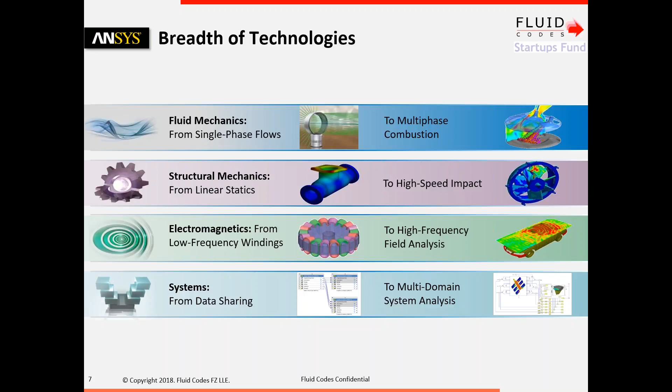And also from the systems point of view. The system part will be covered as well in another webinar. But we are able to simulate the whole multi-domain system inside ANSYS. Obviously, we have a huge number of customers nowadays. You have here just a small representation of the most important ones. As you can see, ANSYS is a general purpose software, which means that as long as you are able to draw your geometry, you can simulate it. It's not a software only for oil and gas. It's not a software only for nuclear or for turbo aerodynamics, for example, or automotive. As long as you are able to draw the geometry, you can simulate it, provided you know your conditions.

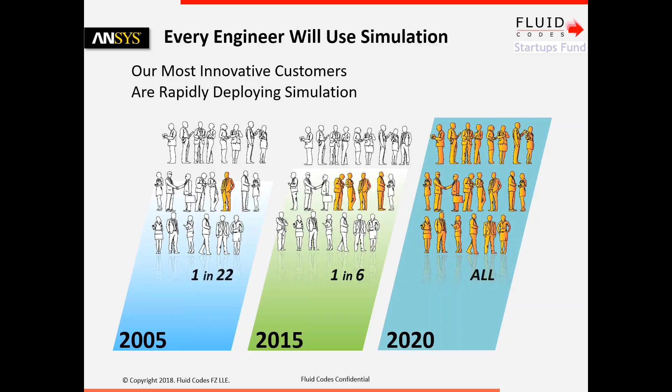Okay, if we talk about the startups, because actually our intention with this webinar was to address and focus more on the startup industry. We are aware at ANSYS that once you are starting your business, obviously the budget is going to be one of the limitations. But on the other side, you want to maybe create a new disruptive technology, which is going to change

let's say the ecosystem. So that's why ANSYS decided to create the startup program, which I'm going to discuss with more information in the next slide. Right now we have over 240 startups in this program, and this number continues growing week after week. So what is this startup program, and what are the benefits?

First of all, you will have the industry leader in terms of simulation. So you will have access to the whole ecosystem for mechanical, fluids, as well as electromagnetics, in order to perform the full analysis of your system. On the other side, you will have access to the largest simulation company in the world, with more than 450 PhD level engineers working in support, as well as many more engineers working in development and support for your cases.

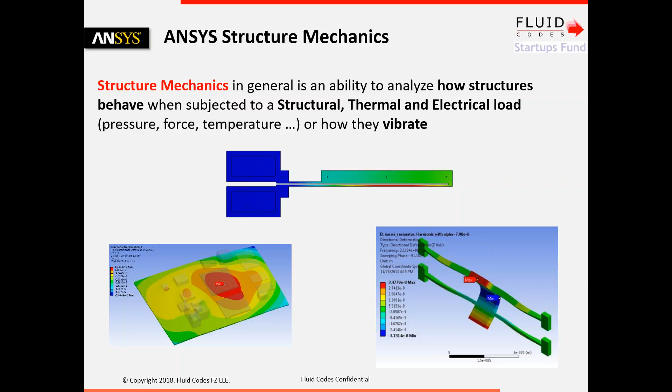So in order to talk about simulation, there are three types of physics that can be analyzed. The first one is what we call structural mechanics, also known as finite element analysis. So everything related with the solid part, everything related with how structures behave when they are subjected to structural, thermal, electric loads, how they vibrate, everything which is related with the solid part will be simulated with what we call structural mechanics.

But there are situations where also we need to take into account the fluid surrounding our structures. For example, in this PCB that you have in this image, you might need to evaluate the cooling process inside the PCB. So in order to analyze the dynamics of the fluid, we will use what we call computational fluid dynamics, also known as CFD. So with CFD, we will be able to analyze any problem related with the fluid part.

As I will show you later, the idea is that we will couple all these worlds. So in other words, if we think about a PCB, I will use CFD for getting the temperature profile of the solid part, and this temperature profile will be interpolated in the structure in order to perform the structural part, like thermal strains, von Mises stresses, etc. So even though I'm mentioning these different physics in a separate manner, the idea is that all of them will be connected in a multiphysics environment.

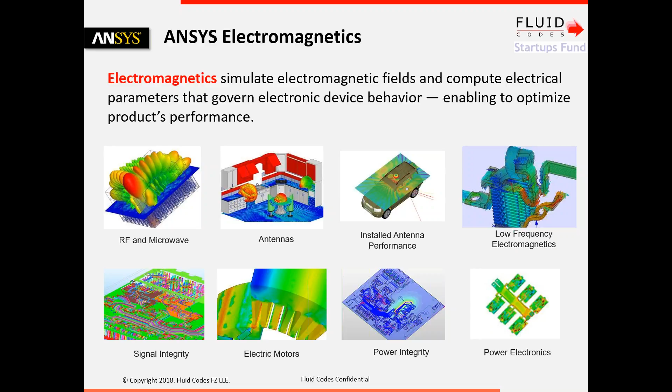All right. If I continue, the third type of analysis that we can perform is what we call electromagnetics analysis. And in electromagnetic analysis, we will simulate anything related with the electromagnetic fields. So let's think about power integrity in a PCB. Let's think about signal integrity. Let's think about antennas, radio frequency, microwaves, low frequency cases like a transformer. All these type of situations which are involving electromagnetic waves will be simulated by performing electromagnetic analysis.

And the good news in this case, as I mentioned before, is that ANSYS has the whole portfolio for this type of analysis. So how is the workflow actually whenever we deal with simulation in ANSYS? First of all, we need to create a geometry. So we need to have a CAD or a representation of the geometry. It can be done outside of ANSYS, or it can be done inside ANSYS. We have both options. And once we have the geometry created, we will create a mathematical model, also known as a mesh.

So once the simulation is done, we will post-process, meaning we will evaluate temperature profiles, we will evaluate currents, we will evaluate stresses, etc. And then we will optimize. So meaning that we will say, okay, I want to have the maximum temperature in this part of, I don't know, 30 or 60 degrees Celsius. So let's change the boundary conditions so that this, which is my target, is matched. So this is what we will call optimization.

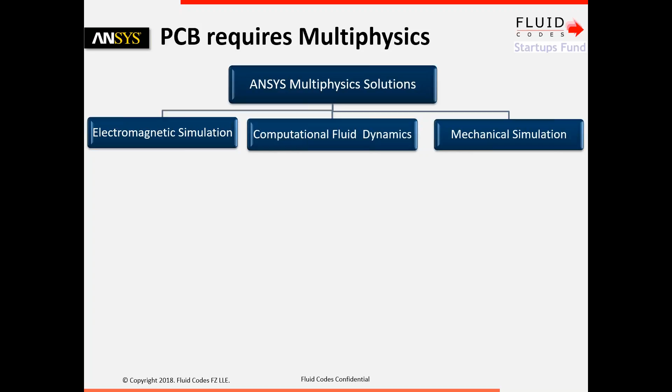All right. So let's think now about PCBs. Since we are focusing on the semiconductor industry, as most of you are aware, PCBs are a key part of structures or devices that we need to design properly. So let's focus now more on PCBs actually. So first of all, PCBs by nature are multiphysics. By multiphysics, I mean that all types of simulations that I described in the previous part are applicable, or can be applied to PCBs.

For example, if we just think about electromagnetics, we may have a PCB where we need to calculate the power map, okay? Or we might need to calculate radiation, interference, current densities. So this is what we will calculate, and we can calculate it with an electromagnetic simulation.

Okay, but the thing is, these currents will be causing, because of the Joule effect, an increase in the temperature in my PCB. So these current densities, which are going to be calculated in the electromagnetic part, I need to import them in my computational fluid dynamic analysis, where I will be able to take into account different gases, different fluids surrounding my structure.

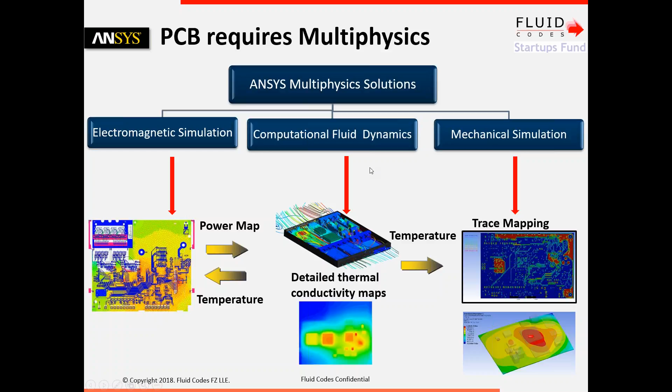So as I said before, the intention of this webinar is to focus basically on the mechanical part. So I just want to give you an overview, a few slides about the other two parts, and in the next months we will have new webinars where we will talk about electromagnetic analysis as well as computational fluid dynamic analysis more deeply. So for this part, I just want to give you a quick overview of each of the other two before going more deeply into the mechanical part.

So if we think about electromagnetic simulations only, okay, we have any type of analysis that can be done there, from low frequency to high frequency. ANSYS has a bunch of products which deal with this type of analysis. So if we see the trends in the electronics industry, we can see that miniaturization is one of the most important parts, okay?

So if you think about the first cell phone, which was invented in 1973, the weight was around 2 pounds. And if you take into account any modern phone, the iPhone 6 for example, we are talking about 4.5 ounces, okay? And before you were only able to talk. Now you can send emails, you can be connected with other people directly with a chat, you can go on the internet. So miniaturization is one of the key points that the electronics industry is going through.

If we think about mobility, wireless connectivity, well, if you think about 12 years ago, let's say 3% of the population maybe were using cell phones. Now every single person has at least one mobile. So you can imagine how many antennas you need to keep the communications with all these devices.

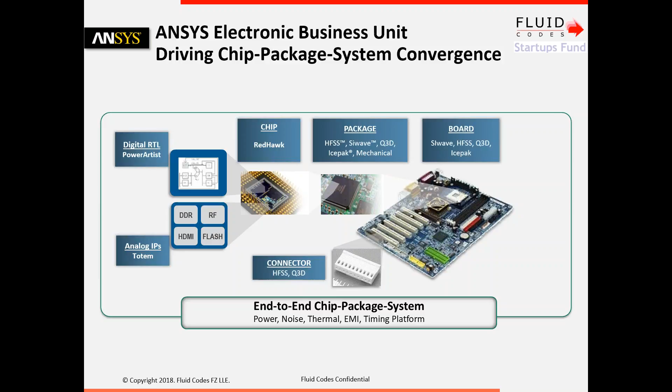Now, if we focus from the computational fluid dynamic point of view, one of the key points where ANSYS is used for PCBs or the electronics industry is for electronic cooling. There is a specific product called ANSYS Icepak, which is an integrated electronic cooling solution for packages, boards, and electronic systems in general.

It is combined with other packages for importing electronic CAD representations of the geometry. It will allow you to automate the meshing process. It is based on ANSYS Fluent, the leader in CFD analysis in the industry, and has a lot of advanced capabilities. It is linked with the rest of the ANSYS product portfolio.

As I said before, we will deal with this in the CFD webinar. But for electronic cooling simulations, there is a specific product called ANSYS IcePak. It includes a vast library of standard electronic components, which will help you model the creations without having to search for the manufacturer's data sheets for additional information.

It includes a lot of information for material properties, for fluids, solids, and surfaces. It takes into account fans, in case you want to simulate the cooling fan for the device. There are operating curves from fan manufacturers like Panasonic, Sanyo, Delta, EBM, etc. It also has a lot of filters, like fan air filters, depending on the vendor part number you want to include in your simulation.

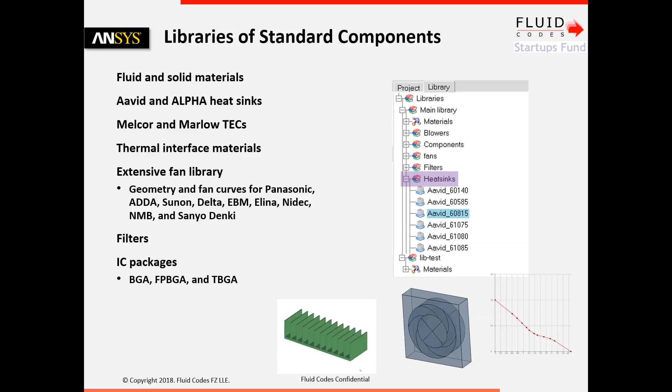So it's completely the tool for taking into account electronics cooling. Even though it's a tool focused on electronic cooling, it uses the best-in-class CFD solver in the industry, called Fluent. Fluent is a very well-validated software for computational fluid dynamics, and it will allow you to calculate temperature profiles using conjugate heat transfer, and also use parallel scalability with ANSYS HPC.

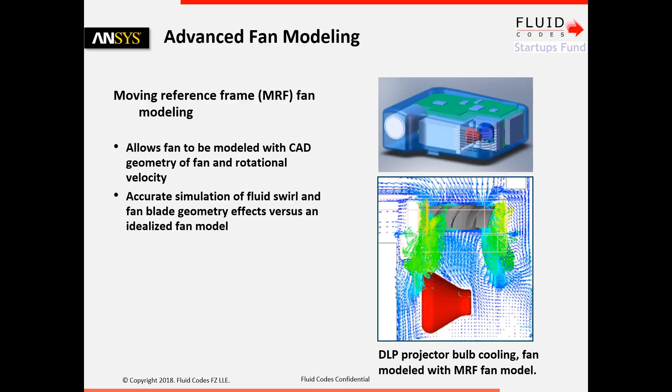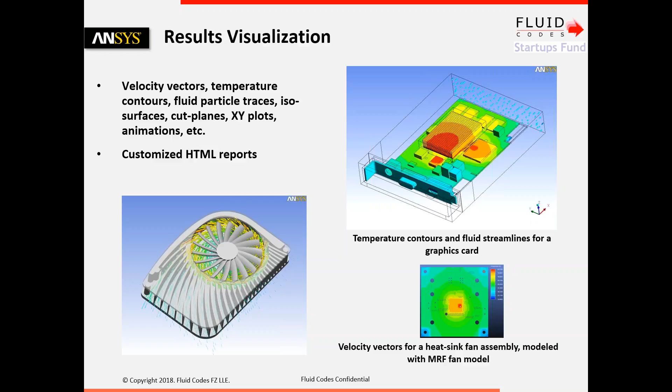As I said many times already, there will be two more webinars based on electromagnetics and CFD. From now on, we are going to focus on the mechanical part of the electronics industry, covering different applications focused on the structural or mechanical part. So what can we do with structural mechanics? First of all, we can perform the simplest type of analysis, a static analysis where we don't account for inertial effects, and we consider linear behavior.

So my material is linear, for example structural steel, aluminum alloy, before having plasticity. But also we can consider nonlinear effects, so let's say we want to take into account a nonlinear material like rubber, hyperelastic materials, or plasticity. We can take into account this type of analysis as well, but this is from the static point of view.

But also we can go and say, no, I want to perform a dynamic analysis, which in PCBs, as I will show you later, is going to be one of the key points. So we might be interested in vibrations, for example, or we might want to do a time history, or something more important for PCBs, drop test.

So all these types of analysis, we can perform them inside the same tool, which is called ANSYS Mechanical.

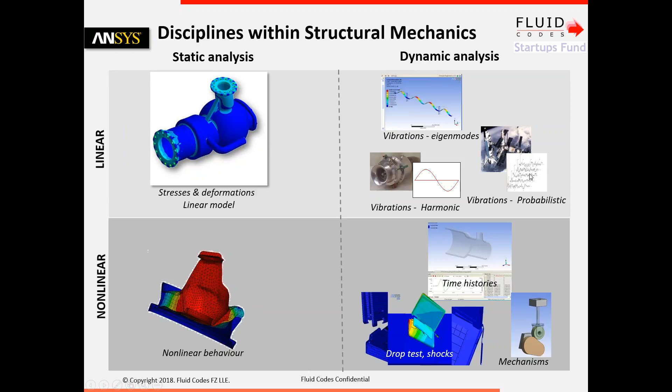These contacts are going to be identified, and something important will also be bolt pretensions. Let's say we have a PCB and a lot of small bolts which keep all the laminates, all the layers, connected. So we will need to take into account the pre-stress in these bolt connections. This can be taken into account with the tool in an automatic manner.

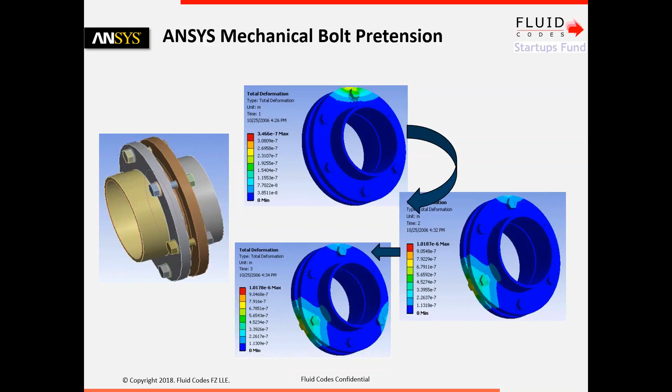After that, we will perform a static analysis and we can perform dynamic analysis as well. The whole portfolio for dynamic analysis is quite big. We can perform harmonic analysis, which is more focused on turbomachinery. But for PCBs, something very important is the natural frequencies of the structure, so modal analysis is going to be a must. Random vibration is going to be very important, as I will show you in the next slides. And explicit dynamics is going to be another type of analysis, really important for evaluating impacts in my PCBs, drop tests for example.

Think about a PCB or an electronic device inside a car. There are many actually inside a car nowadays. Think about the vibrations that this PCB is receiving during the whole life of the product. For this, we need to quantify the vibration in my structure, and not only quantify it, but also calculate how much deformation is going to result from these kinds of vibrations. And eventually, we will end up calculating the fatigue life of the product.

So for vibrations, a transient analysis is not an option. Why? Because if you think about the car going through the road, the first time it's going to receive one type of vibration, but the second time is going to be similar, but not the same one. The third time is going to be different as well, and so on. So we need to perform not a deterministic analysis, but a probabilistic one.

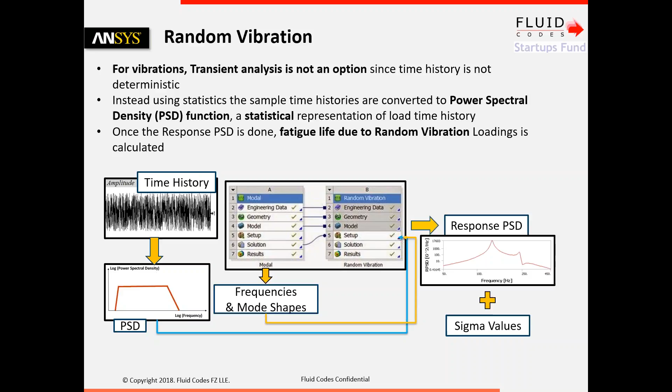One of the most important types of analysis that we need to perform in PCBs or in electronics in general is what we call thermal analysis. With ANSYS, and I will come back to this in the next part of the presentation, we are able to calculate from steady-state thermal analysis to transient analysis.

For PCBs, something very popular will be to perform a transient analysis where we get a curve over time when the electronic device is on, so it's heated up, and then it's off and it's cooling down. So we get this cycle of temperature, calculated by performing what we call a transient dynamic analysis.

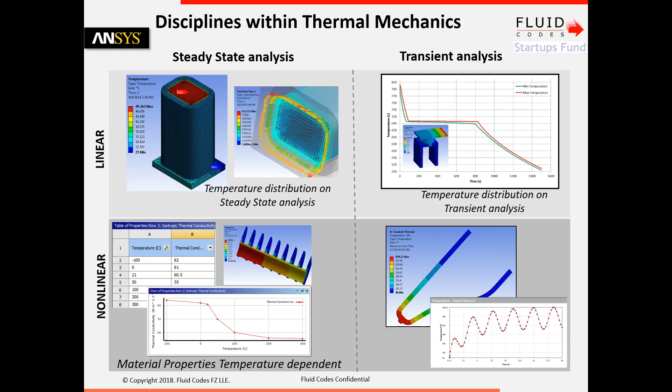Another option is, I don't want to calculate the fluid domain, but I can take into account each effect by using different conditions, like convection. If you know the film coefficient of the fluid surrounding your structure, you can do a simplification, an approach where inside ANSYS Mechanical you can calculate the temperature profile of the solid part. You can impose different temperature profiles, import different heat flow, internal heat generation in case you know that value, and radiation in case you have that kind of phenomenon.

So you can calculate the whole temperature profile inside the same tool, which is called ANSYS Mechanical. You can perform a steady or a transient thermal analysis of the solid part, and take into account the fluid surrounding your structure by considering different boundary conditions.

This is one option, and as mentioned before, the second option, the most advanced one, is to calculate the temperature profile for both the fluid and the solid part by using a computational fluid dynamic analysis. In either case, whether you go through the pure ANSYS Mechanical option, which is the one you can see in the slide, or through ANSYS CFD analysis...

What you will need is to transfer the temperature profile as boundary conditions for the structural analysis. This is done with this link that you can see here. Automatically the temperature will be imported in the mechanical analysis, and so you will be able to calculate total deformations, von Mises stresses, fatigue life, vibrations, etc., because of the thermal boundary conditions.

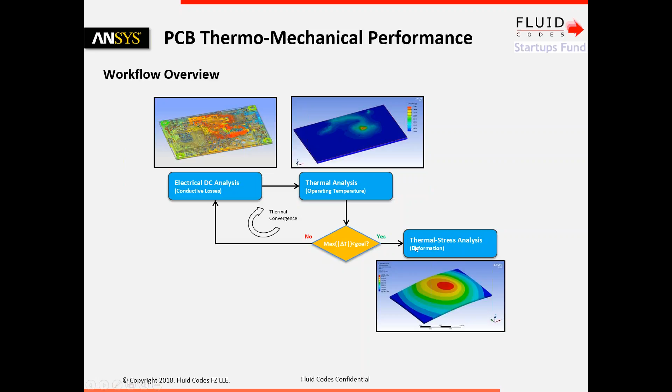This is what I mentioned before as a two-way fluid structure interaction, because as long as the device is heated up, there may be more losses, heat losses, electrical losses as well. So I will be in a loop. Once I arrive at the final temperature profile, this will be the input for my structural analysis, so I will be able to perform what we call a thermal stress analysis. Up to here, this is the whole workflow I mentioned several times during the webinar.

Now, let's think about a PCB. Let's spend just one minute thinking about what a PCB is. If we think about a PCB, what do we have? We have stack-ups, layers of different materials which are forming the PCB.

This is a combination actually of dielectric material as well as metal materials. Typically, we will use copper. So let's say we have several layers which are forming my PCB. Okay, what else do we have in a PCB? We have traces, right? Because the signals have to be routed along the layer, along the metal layer.

But since we don't have only one layer, but more than one layer, we have vias. We have vertical interconnect access between all layers. So with the traces, we are spreading out the signal through the layer, and then with the vias, we are transmitting this signal across all layers.

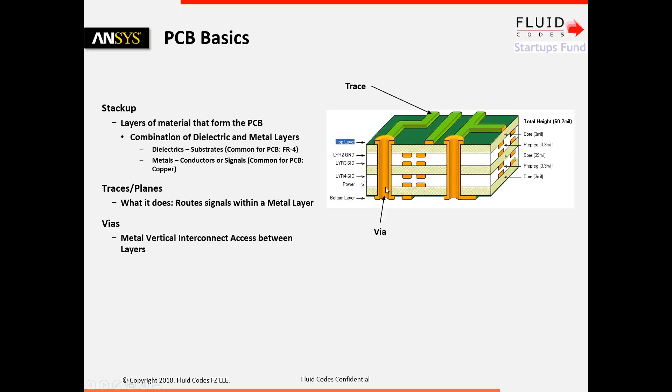Now, what is the idea? If we think about speed versus accuracy, the first option, something which was used traditionally, we can create a lumped board properties approach of my PCB, which means in terms of accuracy, it's not going to be that accurate, but it will give us velocity. Why? Because what we are doing is just imposing equivalent material properties, like orthotropic properties for in plane and normal to the plane.

Obviously, we are not taking into account the proper representation of the traces. We are not taking into account the vias as well. So essentially, what we are doing is just creating a small box, as I will show you later on, a thin box actually, and we will impose equivalent material properties. So we will get an approximate solution, but it's not the most accurate one that we can perform.

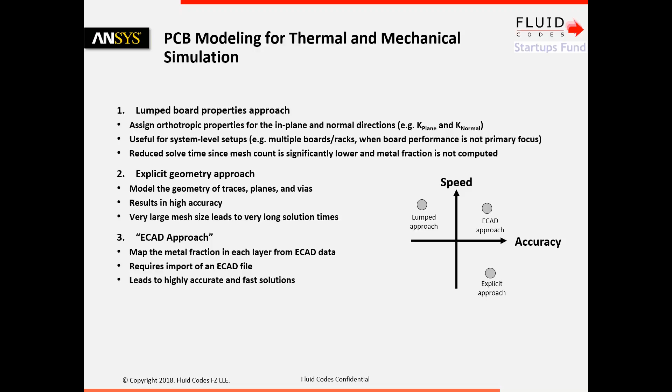So what we are doing, and I will show you later with more information, is just creating a simple mesh, a simple representation of the PCB, and we will map the metal fraction of each layer coming from the ECAD data. Okay, so this is actually the one that we are going to focus on more during this presentation.

So the traditional approach, as I mentioned before, we will export the STEP file from the board layout, from the ECAD software that I mentioned before. It will take around 30 minutes in the best scenario. Then you have to import it in our tools. We have two tools for geometry representation, DesignModeler or SpaceClaim. Let's say it will take in the best scenario around 10 minutes. So we have already 40 minutes only for reading the file.

You have to mesh it, which is the most important part here. You have to specify your boundary conditions. You have to solve. This is not an option right now, okay? This doesn't work, I can tell you. Nobody in the industry is able nowadays to do this explicit approach.

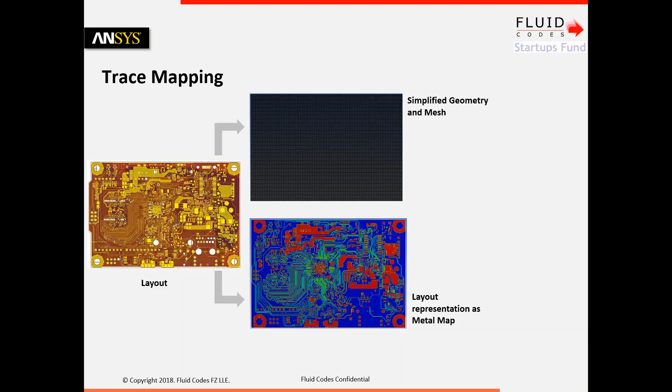Then we are going to import the layout representation, and this layout representation is going to be mapped on the target mesh. So essentially, in terms of the computational solution, this is the mesh which is going to be solved. But we are also taking into account the trace mapping because of the layout representations that we are importing from the ECAD system. I can show you later in the demonstration, this will take much lower time for the simulation, and the results will be almost the same accuracy as the explicit approach that I mentioned before.

So what the software is doing is, here you can see the black lines are the structural mesh, the FEA mesh. And you can see in blue, for example, the software is mapping the different material properties, whether it comes from FR4, for example, for the dielectric, or from the copper, depending on the material that you are using for the tracings. So the software is mapping the conductivity on each cell.

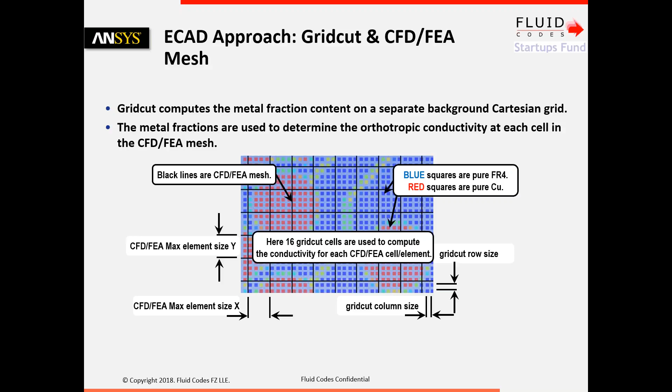In other words, if you don't do this mapping on each cell, you will have the same thermal conductivity. But by doing this trace mapping, the software is able to map the conductivity on the FEA mesh cell by cell. That's why it's going to give you much more information, and it's going to be more accurate than if you take into account just the lumped model.

Actually, I can show you here an example of what I mean by lumped board and ECAD board. In the lumped board, we are taking into account all these components that you can see here, even the fan, etc. But the tracings, as well as the vias, are not taken into account. So we are just imposing an equivalent thermal conductivity. With the ECAD board, with the trace mapping approach, we are taking into account all these tracings that you can see in the PCB.

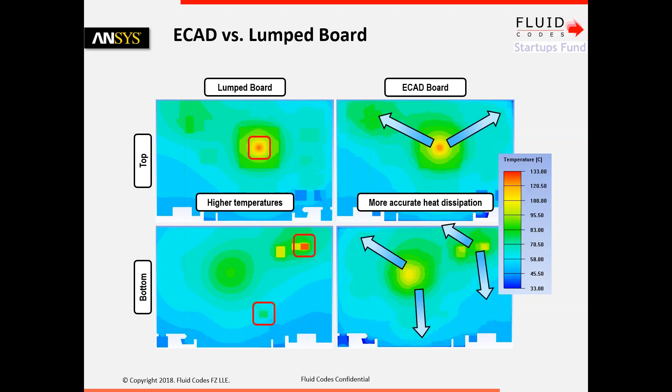If I show you some results, for example, for the lumped board I'm getting higher temperature values in some areas. I'm getting a more accurate heat dissipation in the ECAD board, obviously, because now I'm inserting the proper and most accurate tracings in my layer. So I'm giving the PCB different orientations, different traces where the heat can be dissipated. That's why the ECAD board approach is going to give you a more realistic result than a simplification like the lumped board.

So how are we going to do this import of the geometry? Well, the first thing is to directly import the PCB layers, only the PCB layers, okay? And then by using what we call External Data, we are going to import the trace information from software like Cadence or Allegro that I mentioned before. We just need to export the ODB file, for example, and it will be read in our External Data module inside Workbench. Then we combine both so that I can perform the static structural analysis taking into account the trace mapping.

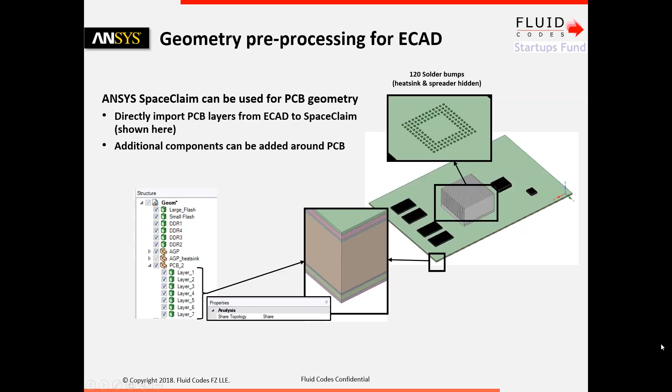So very simple, as you can see. And then the trace import in Mechanical: once you import by doing this external data, once you read the trace information, it's going to be mapped already in the FEA mesh. So once you create the mesh, all thermal conductivities are going to be imported, and we can also control how many points I want to use.

The higher the number of points I use for the discretization in X and Y, the more accurate I'm going to get, but obviously the longer it will take for creating the mapping of the trace. Then, once it is done, because of these connections with CFD, with Icepak, the temperature profile is going to be already imported, interpolated actually, in my PCB, and I can apply the rest of boundary conditions, kinematic or structural boundary conditions, bolt pretensions if there are. I can apply displacement, I can apply some kind of pressures if it's the case.

So by doing this, I'm taking into account all traces from the structure, as well as the temperature profile, which is coming from CFD. This temperature profile, as I said before, may come from CFD, or it may come also from ANSYS Mechanical, in case you impose boundary conditions which are equivalent to the fluid surrounding your structure, okay? So we have both approaches. In any case, regardless of where the temperature profile is coming from, you can evaluate the results after that.

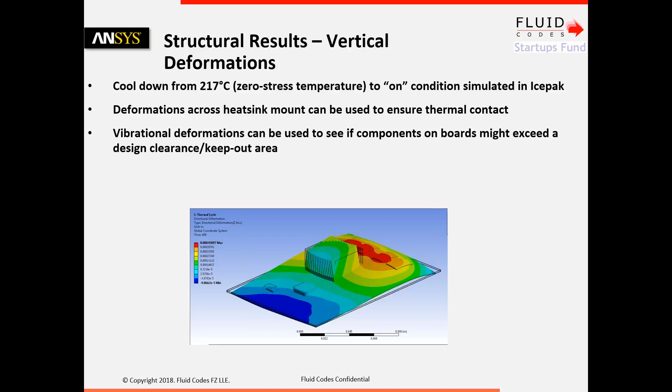So for example, here we are just cooling down from 217 degrees, which is the zero stress temperature, to the condition simulated in Icepak, where you are applying the cooling process with the fans. And you can evaluate, like in this case, deformation across the heat sink mount. You can evaluate vibrations, deformations, by also taking into account all the temperature as well as the PSD that I mentioned before, power spectral density. We can evaluate layer by layer information, shear stresses, von Mises stresses. We can inspect layers individually and see how the connection between each layer is.

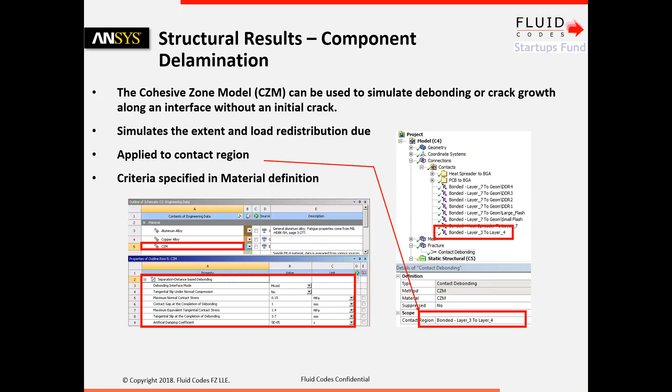I can actually go further. I can say, look, I want to impose what we call a cohesive zone model material property in the connection between layers. By doing this, I can impose maximum stresses that my layer is going to withstand, and after that the software is going to debond. Layers are going to be debonded, and the contact, the connection between layers, is going to be disconnected. So I will see what you can see in this image: I will be able to see the delamination between all layers.

So by imposing this CZM or cohesive zone model, I can see how the delaminations are going to be because of the temperature profile. After that, I can change the adhesive in case there is an adhesive. I can change the pre-stress or the pretension of the bolts as well. I can evaluate it layer by layer and investigate why I'm having this delamination, which is something I might not be desiring for my design.

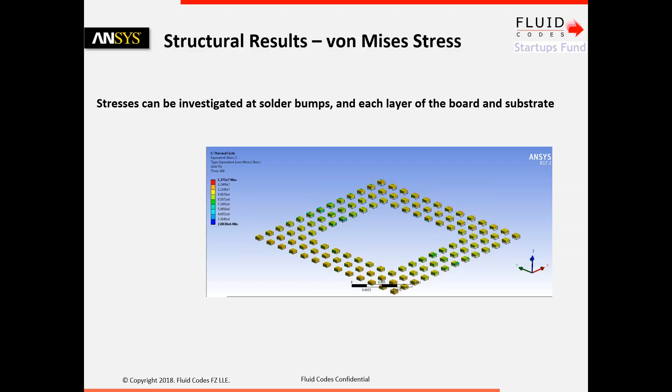More cases or more situations that we may take into account. For example, if we want to evaluate the stresses in the solder bumps, okay? As you know, there are some solder bumps between the layer of the board and the substrate. And something which is typically quite important to take into account in these cases is, obviously we are having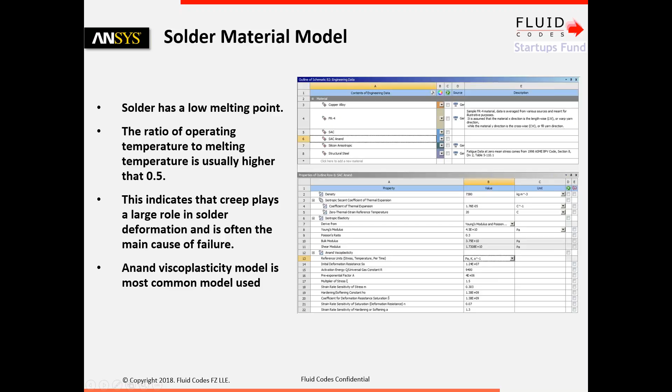So this paper, or the correlation on this paper, has been inserted inside part of the post-processing for fatigue in ANSYS Mechanical. So you just have to provide some constants, K1 to K4, which are material properties. So the software is going to be able to give you actually the cycles to start to have a crack. Okay, so this is going to be very important in order to understand how the solder or the weldings between the bump connections between layers behave. So this kind of fatigue life can be evaluated by using, as I said before, ANSYS Mechanical.

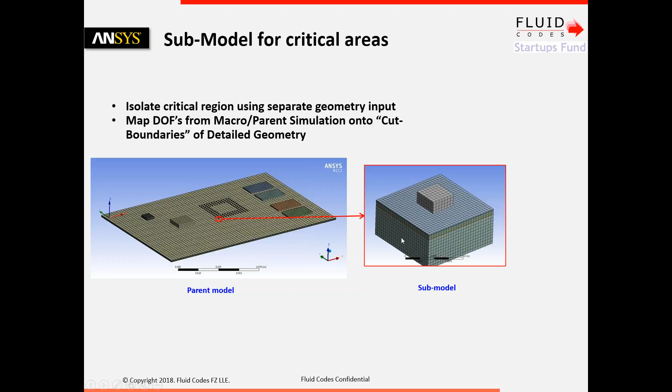You may need to go further actually, and you may need an even more accurate solution. So we can use the technique which is called submodeling. In the technique called submodeling, what we will do is a global analysis of my PCB, where this is called the global or parent model. And then we will isolate the specific part I'm more interested in analyzing, separate it. And the idea is that the displacement from the global analysis will be imported as boundary condition in the submodel.

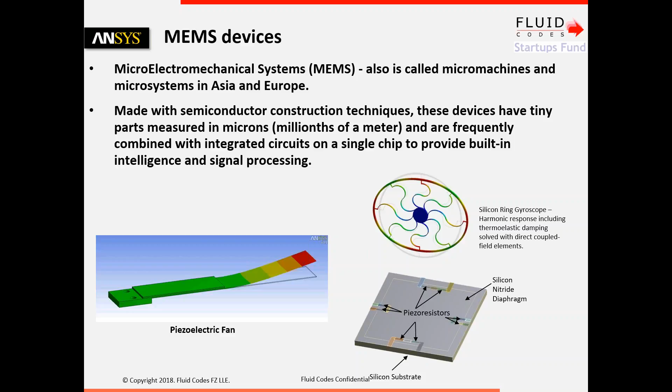All right, so just before finishing and going ahead with the demo, I just wanted to show you not only cases about PCBs, but also about microelectromechanical devices, because they are also important in the semiconductor industry and in the electronic industry in general. So as you know, MEMS, microelectromechanical devices, first of all, are very small. We are talking about micrometers thickness devices. They are widely used in the industry for different situations, like for a fan, like this piezoelectric fan, for piezoresistors, as you can see in this image on the right side. So there are many types of applications where simulation can be of use.

For example, if we think about thermal electric applications for bolometers, electroelastic situations for actuators, piezoelectric for creating sensors like transducers, resonators, etc. Piezoresistive type of analysis for pressure sensors as well, strain gauges, damping for MEMS resonators. There are many types of applications that can be simulated in the microelectromechanical devices world. So what I want to do now in the next few slides is just show you different cases that have been analyzed by using ANSYS simulation tools.

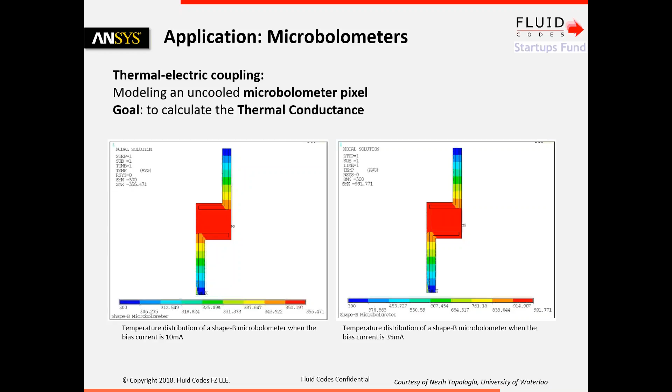So according to this, you can evaluate different shapes, you can evaluate different material properties, and in the end, it's going to give you the thermal conductance of this microbolometer, which is one of the design criteria that you need to take into account whenever you are manufacturing these devices.

Another example would be a thermoelectric cooler. Typically it works with a principle known as the Peltier effect. In the Peltier effect, the cooling occurs when a small electric current is passing through the junction of two dissimilar thermoelectric materials, called P-type and N-type semiconductors. So basically what we have is a cool side, which is the heat absorber, and we have the hot side, which is where the heat is going to be rejected.

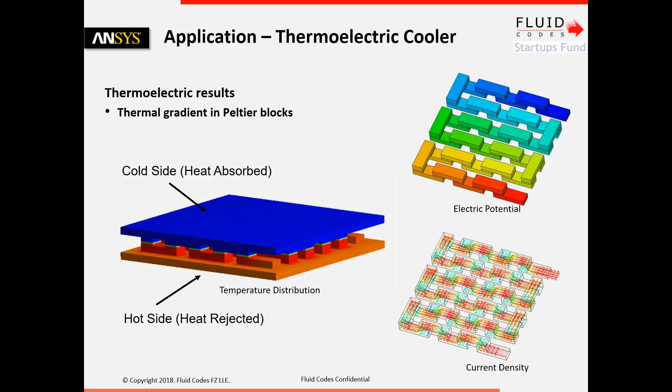So we can apply some currents in what we call the Peltier blocks. And then, by using simulation, we can get the temperature distribution, the current distribution, the electric potential, and by doing so, we can change the design of the blocks, or we can change the boundary conditions and see how this thermoelectric cooler is going to act on my device. Okay, so this is another type of application that we can take into account, in this case for thermoelectric coolers.

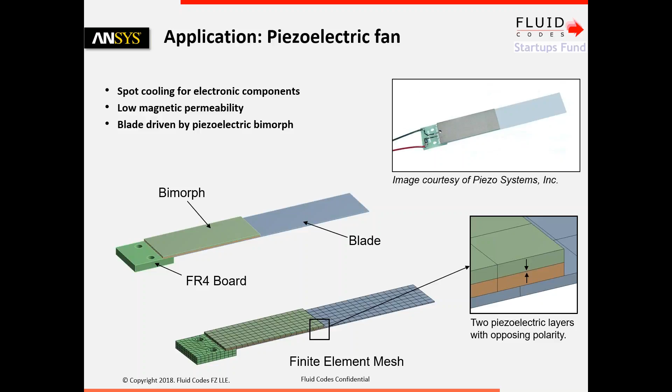So basically what we have is an elastomer material here, and two layers of piezoelectric ceramic, which are bonded and have opposite polarity. At the moment when an electric potential is applied across the piezoelectric bimorph, which is the name of this device, large bending motions are generated, and it will cause the movement of the blade.

Just before finishing, another case is a transducer. What we are doing here is placing 4 piezo resistors along the perimeter of a square thin film diaphragm. There are 4 sensors connected with an electrical bridge in order to measure the amount of mechanical pressure applied to the surface.

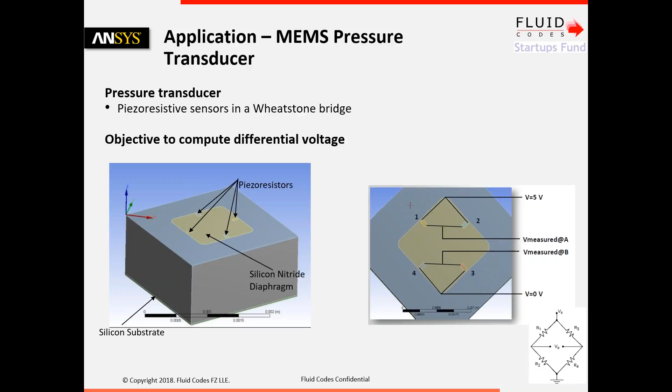Based on the deformation, we want to calculate the differential voltage. For example, one of the outputs the software gives me is, based on the pressure applied, the voltage I need to take into account for this transducer.

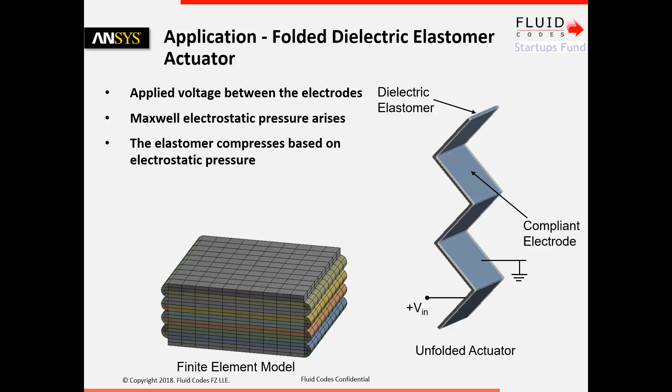There are many cases like this. Here's another one, this elastomer, where I want to apply a voltage between the electrodes. By applying this voltage difference, something which originally was unfolded, as you can see on the right side of the image, will start to deform and touch the rest of the layers until being closed.

This is an example of electroelastic results. Depending on the voltage I'm applying, it will close more and apply a bigger pressure, etc. This is the last example, of an elastomer actuator.

All right, so conclusions about ANSYS strengths. ANSYS solutions help predict reliability for different analyses in a PCB life cycle, as I showed you in the previous slide. It's basically a multiphysics analysis, so yes, you can do everything with only ANSYS Mechanical. You can perform the structural analysis and also take into account the thermal response.

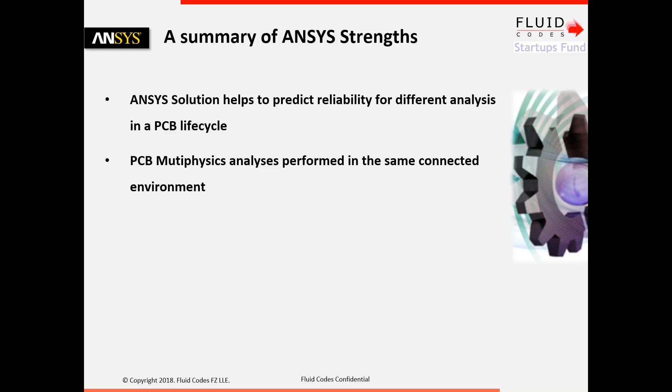But if you want to be more precise and accurate with the results, in the end you will need to perform a multiphysics analysis in which you start with electromagnetic analysis, then calculate the temperature profile in CFD, and then end up calculating the structural response in the FEA, or finite element analysis. Everything is connected in the same environment, which is one of the most powerful aspects. The whole domain is connected, and the tool can communicate between all types of analysis.

There are many automated scripts, templates, and what we call customization. You can customize the tool so that it becomes easier to simulate all these interconnected analyses. For startups, this helps you simulate more cases or have more designs at the same time, and obviously the idea is to reduce the time to market.

All right, so that's everything for this PCB or semiconductor part of the presentation. What I want to show you now, we have around 30 minutes, a bit less since we'll have questions after, so let's say 20 minutes, where I want to show you live a demonstration of using the software, in this case for a PCB.

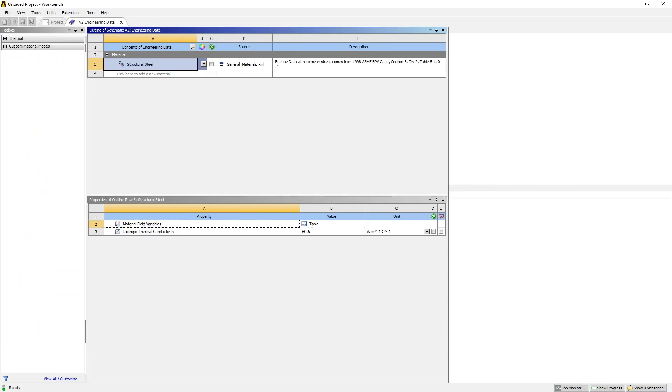Here I can define my material properties. I have a library of materials which comes with the software. Whenever you install it, there's a huge number of materials you can use depending on your analysis. I also have a customized one called engineering data. You can create your own library of materials, which you can then share with the rest of the engineers in the organization.

In this case, I want to use FR4 for the layers. I also want to use a components material, which is specific one I created, and TIM, another specific one I created for these devices, and aluminum alloy for example. Structural steel was always there because it's the default material. So I have a bunch of materials that I can use for my analysis.

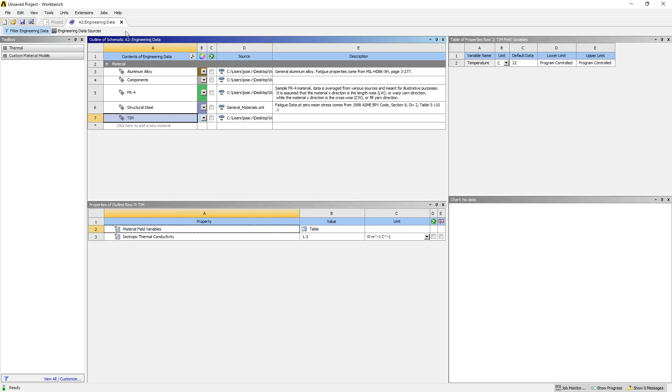So I'm just including them in my project. This is the only thing I'm doing whenever I click to add them to the simulation. By doing this, they are ready to be used afterward in my further analysis.

Now I have the component called geometry, where I'm going to import a geometry I have already created before, called Mech PCB. Let me show you how it looks like - I'll actually show you later in the mechanical component. What I'm doing now is importing the geometry into my project, in case I'm interested in simplifying how it was created.

Sorry, it was open in the other screen. Maybe here I want to make this part bigger, or remove the bolts, or change the shape of the PCB. Any of this type of cut, repair, or simplification I can do in this tool, called ANSYS Workbench, ANSYS SpaceClaim.

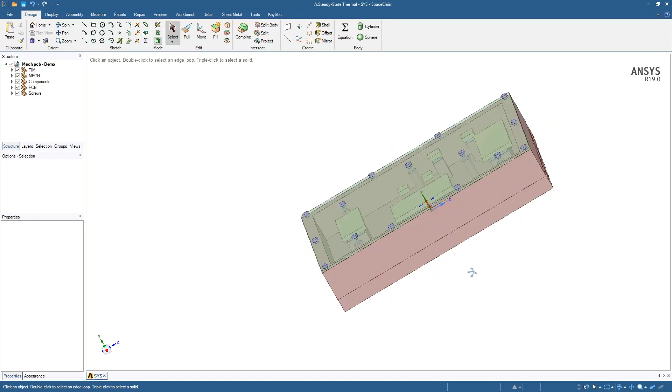For this case, I just imported this geometry from another CAD tool, and then I can continue working on preparing it for my analysis. But as I said, you can also create the geometry from scratch. So I'm going to close SpaceClaim because I'm going to work with this geometry.

The next step is to open the analysis tool, called ANSYS Mechanical. With ANSYS Mechanical, as I'm going to show you now, the tool will import the geometry from SpaceClaim automatically. I don't need to save or do it manually - the only thing I need to do is specify the file, that's it. So the software is reading the geometry from SpaceClaim and importing it back to ANSYS Mechanical.

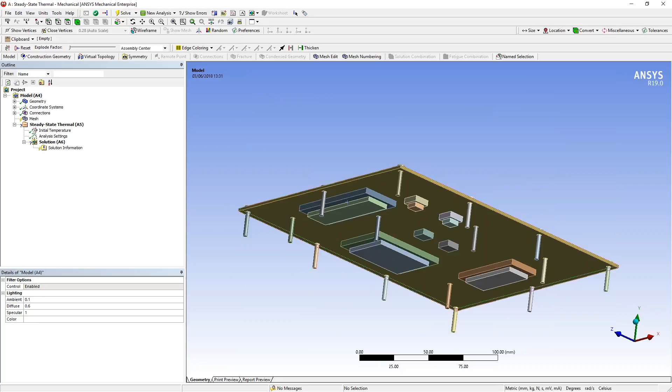So this is the same geometry that I showed you before. You can see there is a heat sink here. I can hide it to show you the component inside. There's a bunch of bolts which are connecting, in this case, the heat sink with the main part, or the layer, of the PCB.

I have some components here, different components which are connected to the main part of the PCB. And obviously I have this - all bodies. I have this part here, which is the heat sink. It's the part where the heat is going to be sunk on my device.

So the first thing I'm going to do, as you can see, it's just respecting the names from SpaceClaim. I have these 5 bodies here, which I called beforehand TIM. So I'm going to assign the material called TIM - I select it, that's okay.

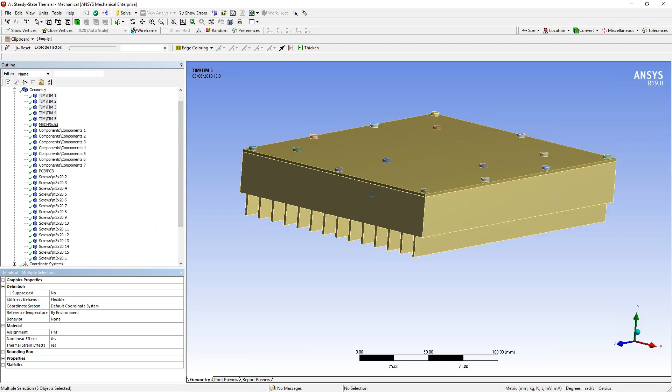The other thing I'm going to do is, there's this component here called Mech Solid in this case. I can change the name at any time - this is the heat sink actually. So for this one, I'm going to use aluminum alloy.

Then there are these components. I can show you if I hide this body, there are these components that you can see here, all these bodies. So for these components, I created a material called component, and I'm going to assign this material.

Then there is the PCB itself. I'm assuming in this case that it's FR4 material. As I said before, what I'm doing here is using the lumped approach, but in the next example I'm going to show you, I can do the same for the trace mapping. In this case, I'm not mapping any trace, etc. It's just to show you the workflow for performing a thermal and a structural case.

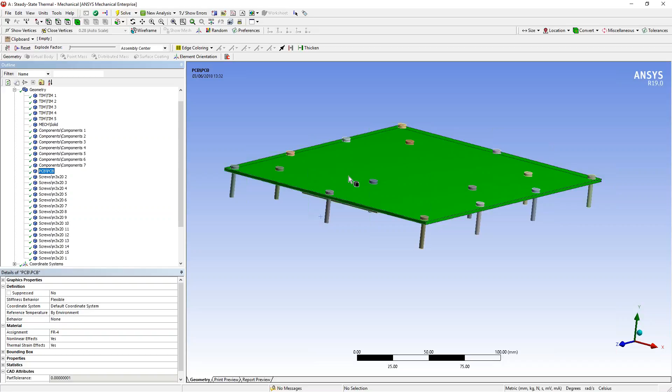And then I have these bolts that I can assume are all just structural steel. This is the material actually used by default for these bolts. All right, I'm going to show all components.

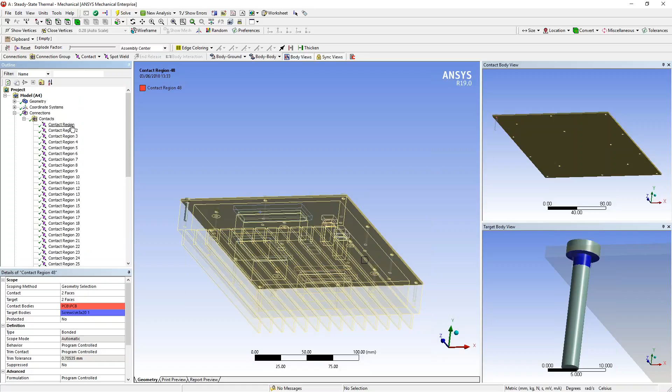Great, the next thing I have is the connections between geometries. This is what I mentioned before. All connections, all contacts between the geometries are detected automatically, and this saves a lot of time, trust me. Otherwise you have to go and manually define the contact body by body. So if you think about this case, it's a simple case which has almost 48 connections. So you can imagine how tedious it might be to create the contact between all geometries. So as I said, this is an advantage of the software because it's able to detect them automatically.

What I can do here is just rename based on definition, so it will be simpler for me as long as I'm just creating a name for my bodies. It will be simpler for me to identify which contact is being used for each part of the PCB. And also it will allow me directly to see, okay, from this to this PCB part, which I can see here in red and in blue, this is the pair of contact.

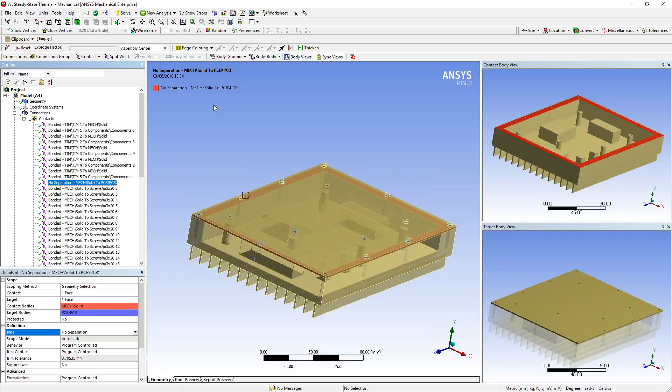Maybe I want to change this contact and I don't want to use a bonded one. Bonded means that everything is connected. I will use, for example, a no separation one, which means I'm allowing both surfaces to slide between themselves. So I can go individually and check each of them, and see, okay, this contact is going to be of this type, this other contact is going to be of another type, etc. So I can just go one by one and check and say, okay, I want to change it, I'm going to allow separation, I'm going to include the delamination properties, etc. This is something I can include contact by contact.

All right, so once I'm happy with my contacts, the next step is to create a mesh. So I'm just right-clicking mesh, generate mesh. Just for the demonstration, I'm going to use the default mesh. I know it looks a little bit like it can be refined, but I just want to have a mesh so that later on I can perform an analysis.

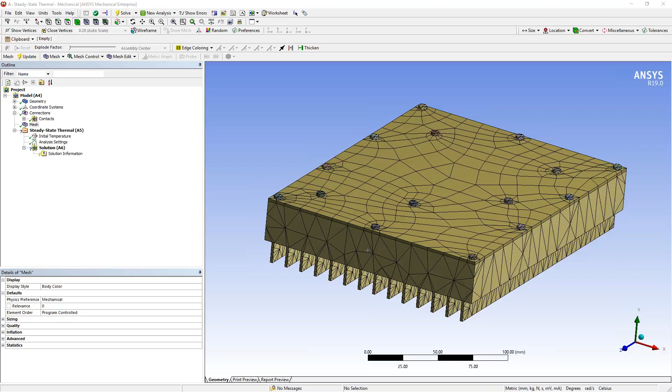But in case you want to refine the mesh, there are many controls under mesh where we can insert them and refine them, and the software is going to refine automatically the mesh based on my inputs. So I have a lot of considerations, approaches, and options I can use here for refining my mesh. Okay, as I said, I'm going to assume that this mesh is the one I'm going to use, so it means I'm happy with that.

So the next thing I'm going to do is the thermal analysis. For the thermal analysis, as I said before, you have all these surfaces that you can see here, all these surfaces which are actually touching the air. So what I'm going to do is select them all, as I'm doing here.

Okay, I have almost all of them selected, these 61 surfaces. And because I'm going to perform the thermal analysis of the solid part, but I want to take into account also the fluid surrounding, what I'm going to do is insert a convection load. So right click, insert convection.

And then here, this is something you need to know. You need to know how much the film coefficient is. In this case, I know that the value for the air is this value, so I can directly use this value. Now, if you are asking yourself, okay, but I don't know this value, how much is it? How can I approach it?

Then you need to do a CFD analysis, as I mentioned before. With a CFD analysis, with Icepak, you will calculate the temperature profile of both the solid and the fluid side. So you don't need to include an equivalent boundary condition, because this film coefficient, this convection, is already taken into account when the software is solving the equation system.

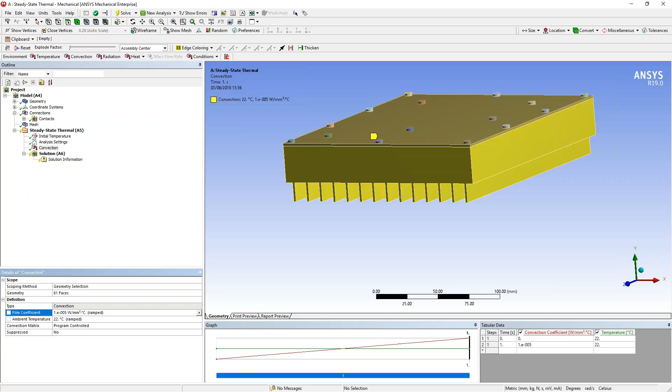So in this case, as I said, I'm not going to perform the CFD analysis, so I'm just taking into account the effect of the fluid in my structure by inserting a convection load. All right, now there are more components. If I just hide this body, you can see that there are other bodies that are being heated up because of the currents acting on them.

So what I can do in those situations is insert what we call an internal heat generation on these different bodies. Just to show you, in here, for example, on this body, I'm going to say I have an internal heat generation. You know how much heat is being generated, so you can apply it. Okay, I can continue with the rest of the bodies.

So for example, let's say I have another internal heat generation here on this body, and I know this value, so I insert it. I can go to the rest of the bodies, and I'm just taking the results from another table. So I have here internal heat generation of this value, per millimeter to the power of 3. Same for this body, internal heat generation, and I have this value. Another one for this body here, so insert heat generation.

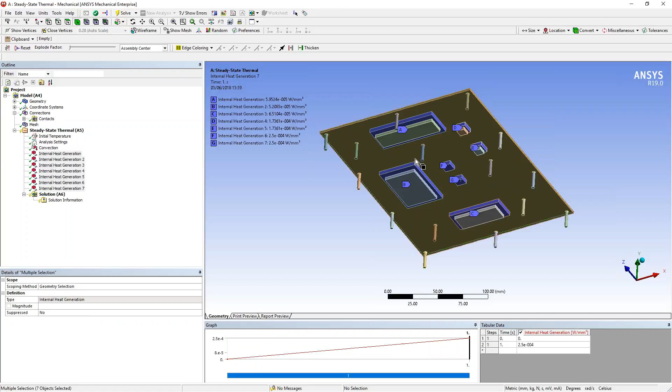Obviously, since everything is connected, once I run the simulation, which is what I'm going to do now, I'm going to click on solve. So what I'm doing, if I show all bodies, there is an internal heat generation in these components, and on the other side, on this body, I have a heat sink through which heat is being evacuated from my device. Because of this, I can calculate the temperature profile. I just click on solve. The solution has finished now.

And what I'm going to do is insert, for example, the temperature profile in my domain. Maybe I don't want to show the mesh. So I can directly see the temperature profile. Maybe I want to go body by body. So let's say I want to go to this body and I want the software to show me the temperature profile. By doing this, I can see which areas are being heated up more than the others.

Let's say I want to evaluate, for example, the total heat flux on this body. And by doing this, I can see only on this part how the heat is being evacuated from the hot areas to the cold ones by the heat sink.

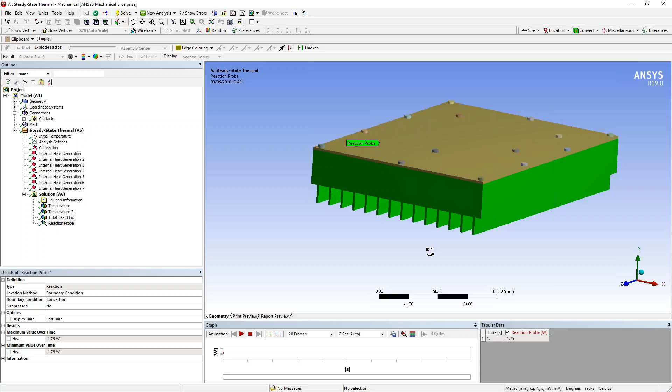Maybe I also want to evaluate how much heat is being evacuated. So I can just drag and drop the convection boundary condition that I applied before. And I can see how much heat, 1.75 watts, is being evacuated, going through this heat sink that I have made of aluminium.

Okay, so by doing this, I can evaluate my results. Obviously, after that, I can change the designs, I can change the boundary conditions, I can change the shape, I can play with that and run the simulation again. So the whole process is going to be persistent and consistent.

All right, so now I have the temperature profile in the whole system, and I want to calculate how this PCB is going to be deformed. So what I'm going to do now, I'm just coming back to the project. I'm coming back to Workbench, and I'm just going to drag and drop a static structural component, and I'm connecting it, as you can see here, to the thermal analysis that I have done before.

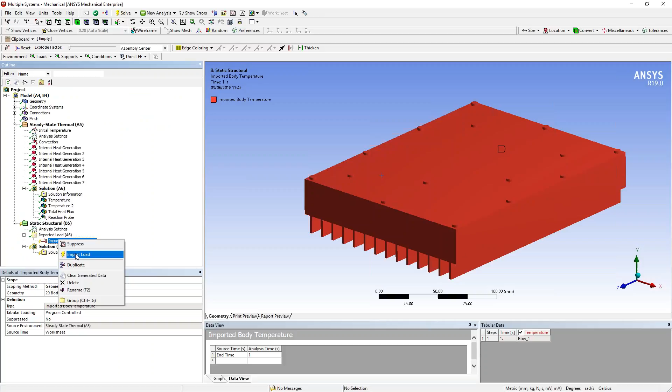And what I'm telling the software is, look, the solution, so the temperature that you have just calculated, insert it as a boundary condition for my structural analysis. So if I just come back to ANSYS Mechanical, you can see that I have now a new component, which is called Static Structural. And in this new component, what I have now is imported body temperature. So this imported body temperature, I can just evaluate. And these are the temperature values which are coming from the thermal analysis that I have performed beforehand.

So as I said before, you don't need to take the values of the temperature from one mesh, from the thermal analysis, and interpolate it in another mesh. No, this is no longer necessary. Automatically, the software is clever enough to take the temperature from the thermal analysis and impose them in the structural one. So I have the temperature, but now I can impose more boundary conditions.

For example, let's say I have here my PCB, and I just want to fix the structure so that it doesn't move. So what I'm going to do now, I can just select, for example, this vertex, and I'm going to say this vertex is fixed supported. So that vertex is not moved. The only thing I want to do now is to constrain the structure, because I'm not going to apply any pressure, any given displacement value or any force. I just want to evaluate how the structure is going to deform because of the temperature profile. So I'm just constraining some part of my structure, for example, some vertices, like in this case.

I'm going to assume that, for example, in X, it cannot be moved. In Y, it cannot be moved. In Z, I'm constraining the movement. And I'm going to constrain just some degrees of freedom from the other side, in such a way that, for example, in Z, this is fixed. As I said before, I just want to fix the structure. I just want to evaluate how the structure is going to deform because of this temperature profile.

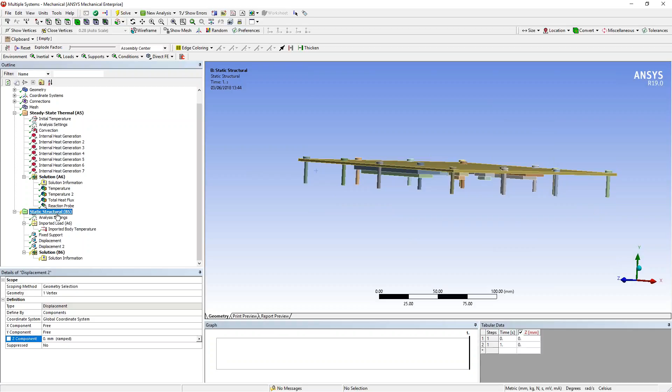But now there is something else that I need to take into account. As you can see here, if I just hide the sink, I have a lot of bolts, and these bolts actually are pre-stressed. So let me just hide also this body. I'm going to say, look, on this cylindrical surface, I'm going to insert what we call a bolt pretension. When you manufacture this device, what you do is you pre-stress the screws, so you are applying a pre-stress, and then you place it in the normal working behavior, so it will start to work and it will start to heat up.

So for this, I'm going to assume 2 load steps. So I'm selecting 2 load steps here. And I'm going to say, look, this temperature profile is going to apply in the end. Why? Because before, in the bolt pretension, I'm going to apply only a pre-stress, without any other load acting on my structure, not even a thermal load. So I'm applying a 100 newtons load on my structure, and then for the second, third, fourth, and so on load step, I'm locking the pre-stress. Why? Because in the second load step, I'm applying the temperature profile.

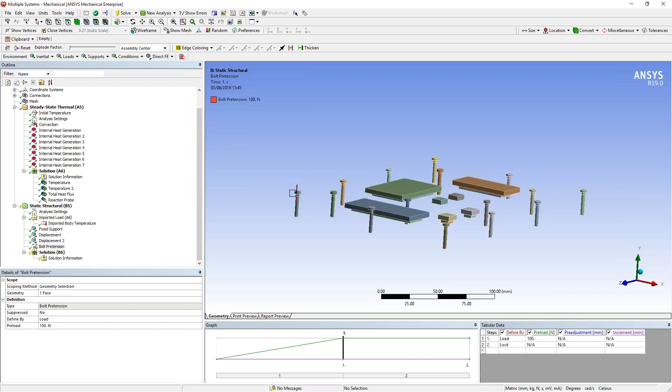All right, so now, obviously, you can see that I have 16 bolts. So I don't want to apply them all manually. I'm just going to create a named selection for this surface, and I'm going to call it bolts, for example. Sorry, not like that.

I'm going to repeat the process. I'm going to create a name selection, which is going to be called bolts, and I'm going to say, apply this to the items with the same size. So by doing this, if I click OK, it has created, as you can see, a name selection of bolts for all the rest of the bolts.

What I'm going to do now, I have this bolt pretension. I'm going to use our object generator, which is used for creating a pattern for duplicating entities which are already created in the tree outline. And I'm going to say, look, the bolt pretension load that I created manually before, you are going to duplicate it in the name selection that I created called bolts, individually, entity by entity. Click on generate, and you can see now all of them have been generated automatically.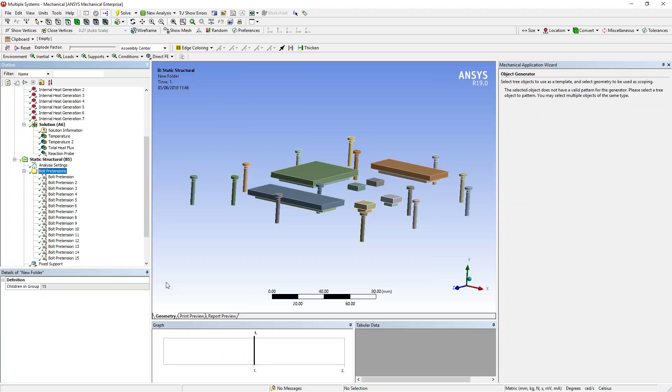So I don't need to go one by one because it would be very tedious and I would lose a lot of time on them. Another thing I can do is I can select them all and group them and say these are my bolt pretensions. All right, I can close the object generator. So what I have here is a lot of bolt pretensions that have been generated automatically by doing this process that I just discussed.

All right, so I have bolt pretensions. I have fixed support. If I just show all bodies, I have fixed support in different parts of the structure. And I have an imported body temperature on my body, okay, for time step 2. So now I have everything to solve my case. So I right click in solve.

And the software is solving the equation system. It's applying all the boundary conditions, and it's giving me a message here that suggests using more than one element across the thickness, but this is just for a demonstration, so it's okay. All right, so once it finishes, I can evaluate, for example, total deformation in my structure, or maybe equivalent elastic strain on this part. I can just evaluate the results.

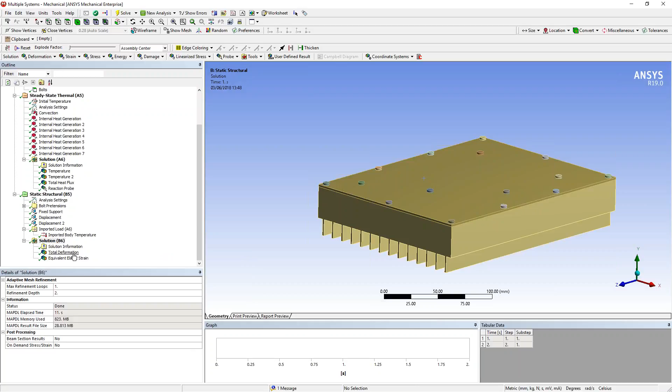So for example, what can I see here? This is the total deformation because of this load, temperature, and bolt pre-stress that I'm applying in the system. I can create a video, and let me just play it with more time and more frames, 40 frames maybe. You can see at the beginning, it is receiving only the pre-stress. It is just pre-stressing the bolts, and now the thermal strain is going to be calculated because of the temperature profile.

Obviously, you can see that here it is a little bit over-scaled, so you can change the scale here and say, show me the true scale. You can see that at true scale, the device is not being deformed that much. So I can evaluate the video again and see how the structure is being deformed because of both the pre-stress and the temperature profile.

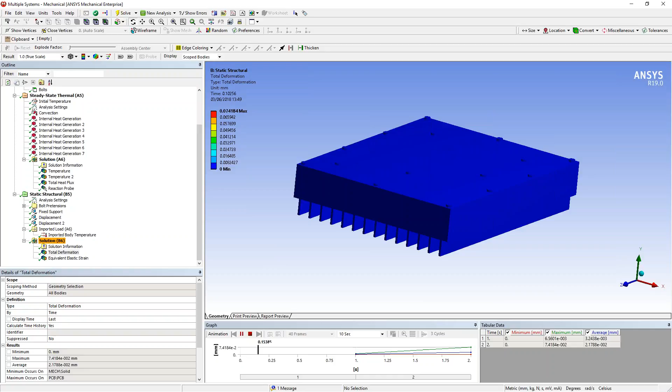After that, I can change anything beforehand. So let's say, for example, if I come back to Workbench, I want to extend the length of the heat sink, and I want to see how much heat is going to be evacuated now because of the change in some part of the structure. So what I can do is open SpaceClaim, as in this case, and select these components, the length of this component. I can select them manually.

Tag, tag, tag, tag, and tag. And I can say, okay, I'm going to pull it. I'm going to make it bigger, something like this. So what I have done is I just changed the geometry. I just changed the length. So I can just close SpaceClaim.

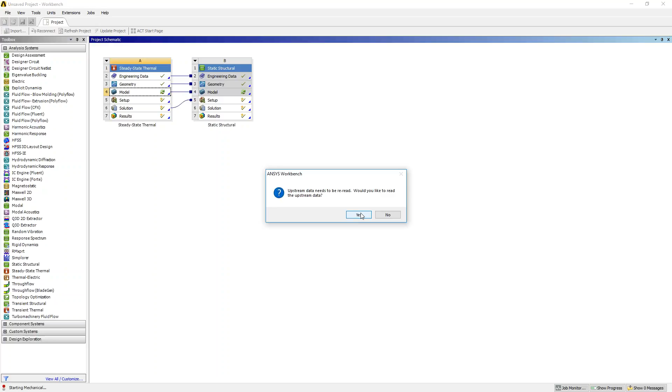And what you can see now is that the software is telling me, look, you have changed something upstream, so you need to refresh the information in Mechanical. So I say, yes, read the updated information. And once I do that, the software in Mechanical is going to read the new geometry and import it, which is what it is doing now. And after that, as you can see here, it is telling you the mesh has been kept for some geometries because they didn't change.

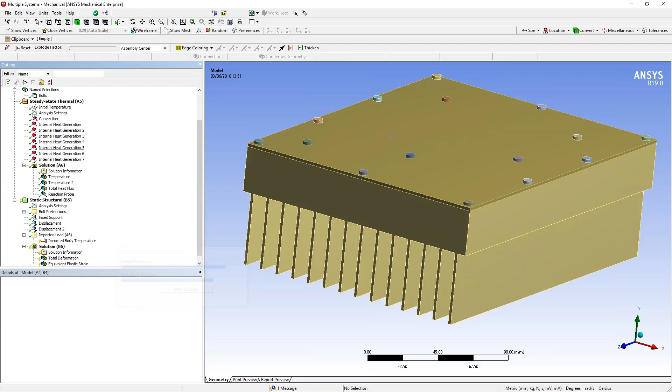So it allows you to not mesh everything again, only those parts which were changed. And then you can just do the same: okay, now I have a different device, update the whole project. And as you can see, all the boundary conditions and loads that I inserted before are remaining. So the software is clever enough to calculate again the temperature profile for this new device. You can see how everything is changing.

What I want to show you now, before going to the questions and answers, is this case that I had before. So what we have done here is we have imported from this module, which is called External Data, a file, ecatutorial.tgz, which contains information from ODB files, from these ECAD tools that I mentioned before. So you can use Cadence, you can use Allegro, etc., and you can import the trace mapping from those ECAD systems.

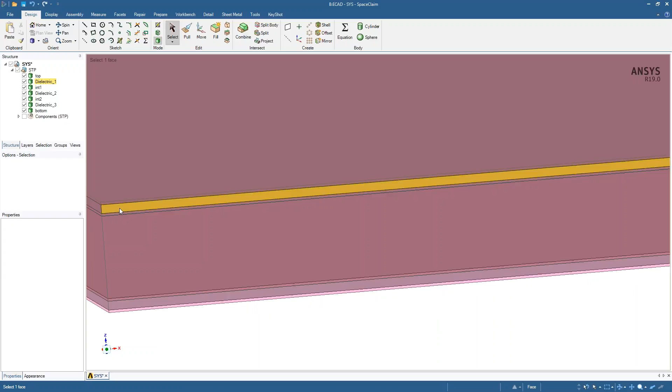After that, if I just open SpaceClaim, I want to show you the geometry. You will see that this is quite a simple geometry. We have created different layers, as well as other components from the PCB. From this PCB, this part is not taken into account for the analysis. The geometry is as simple as different layers with the dielectric and the FR4 material, as well as the shape. It's just a simple representation of the PCB, and the only thing you have to do is to create the layers.

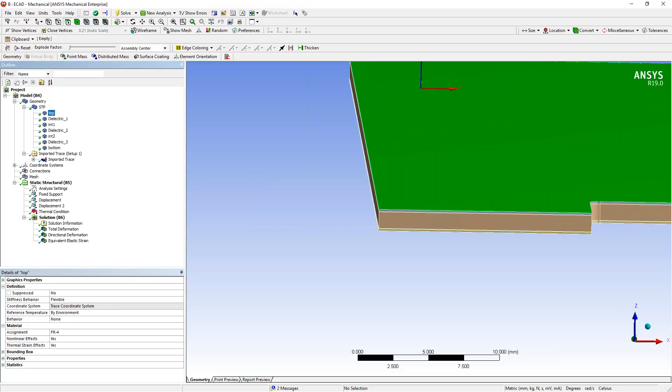Okay, so now, if I just open this part, sorry, not this case, this one. These are the components that I have imported from SpaceClaim. So I have to impose the material. If it's a dielectric, you insert the dielectric. If it's FR4, you insert the FR4. It depends on the material that you are using. And then this imported trace, in this case coming from Allegro. What we have here is the trace mapping, which is taking into account the thermal conductivity of the tracings, and it is being mapped on my mesh.

Sorry, let me just mute everybody.

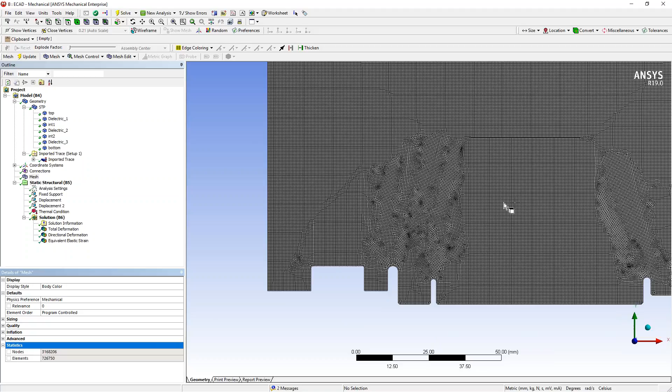If you check the mesh, the meshing is nothing. If you try to mesh these tracings directly, you will need a very, very refined mesh, whereas in this case it's almost nothing. We are talking about 3 million nodes, which is calculated in no more than half an hour. So by doing this, we are importing the tracing. And as boundary conditions, we just applied 50 degrees temperature for all the bodies, just to simplify the case.

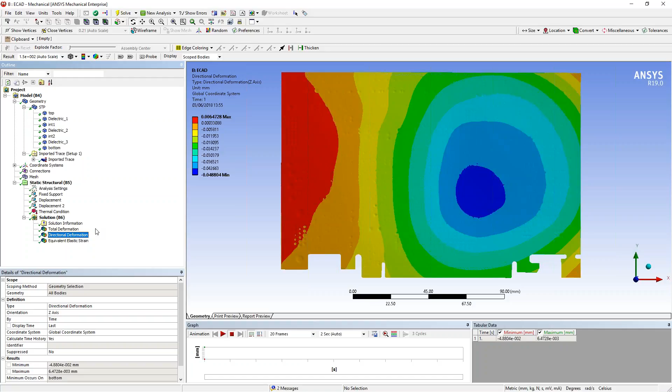Also, you can import this temperature profile with the trace mapping coming from Icepak, from the CFD analysis, so it will be even more accurate. And then you can evaluate total deformation, like in this case. You can see the degree of detail for all layers, okay? Directional deformation as well, how the deformation is in one specific direction, in this case in Z. You can also evaluate equivalent elastic strain.

Obviously, it's impossible to get this grade of detail in a lumped analysis as I did before, okay? So the finer the mesh you have and the more points of discretization you use in the imported trace, in this case I used 400, the more accurate information you are going to get for the final response.